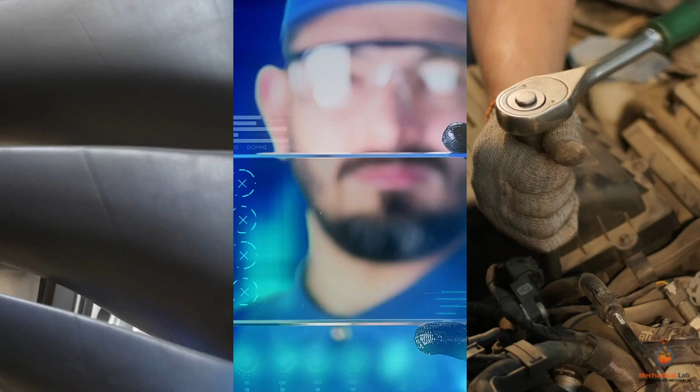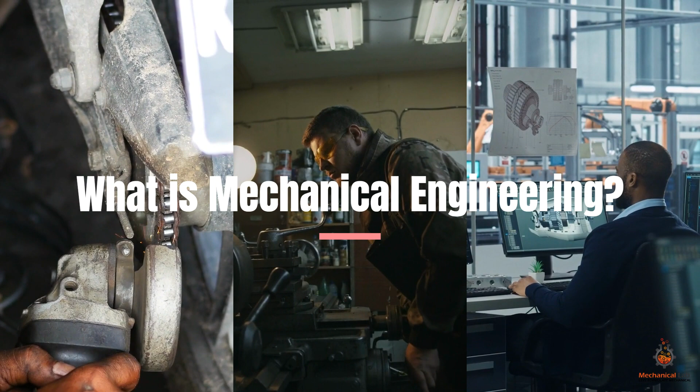In this video, we will delve deep into the fascinating realm of mechanical engineering, exploring its essence, the foundational principles that underpin it, the diverse branches it encompasses, the exciting career opportunities it offers, the skills required for success, and the average salaries that await aspiring mechanical engineers. So, fasten your seatbelts and let's dive in.

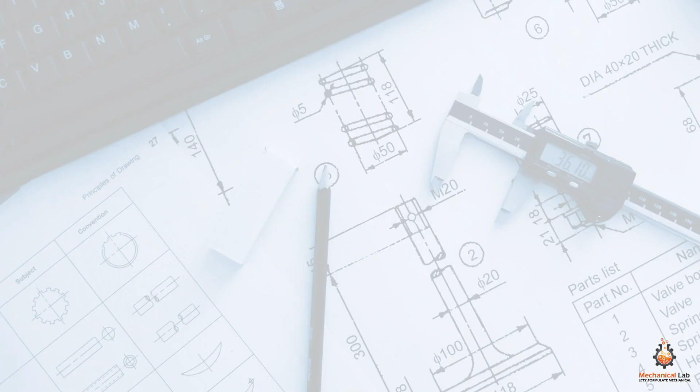What is mechanical engineering? Mechanical engineering is a captivating discipline that blends the principles of physics, mathematics, and materials science to design, analyze, and manufacture a wide array of mechanical systems. It is a driving force behind innovation and progress, shaping the world we live in. But what exactly is mechanical engineering, and how does it impact our lives?

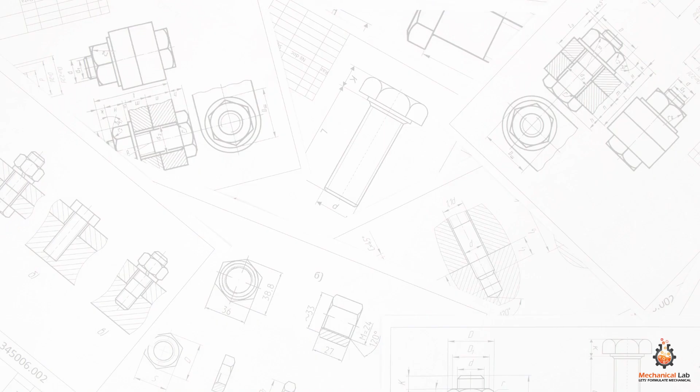Foundations in mechanical engineering. To truly understand the world of mechanical engineering, let's explore the core principles that underpin this dynamic discipline. These principles serve as the fundamental pillars upon which mechanical engineers design, analyze, and innovate.

Mechanics is the branch of physics that deals with the study of forces and motion. It enables engineers to understand how objects move and interact under different conditions, allowing them to design and analyze mechanical systems.

Thermodynamics focuses on the study of energy and its transformation. It provides engineers with the tools to analyze and optimize energy systems, ensuring efficient utilization and minimizing energy loss.

Fluid mechanics investigates the behavior of fluids, liquids and gases, and their interactions with solid objects. It is crucial for designing systems that involve fluid flow, such as pumps, turbines, and piping networks.

Materials science and engineering explores the properties, behavior, and selection of materials for engineering applications. It helps mechanical engineers choose appropriate materials based on their mechanical, thermal, and chemical properties.

Control systems involve the design and implementation of mechanisms that regulate and automate mechanical processes. Engineers use control systems to ensure desired performance, stability, and reliability in various applications.

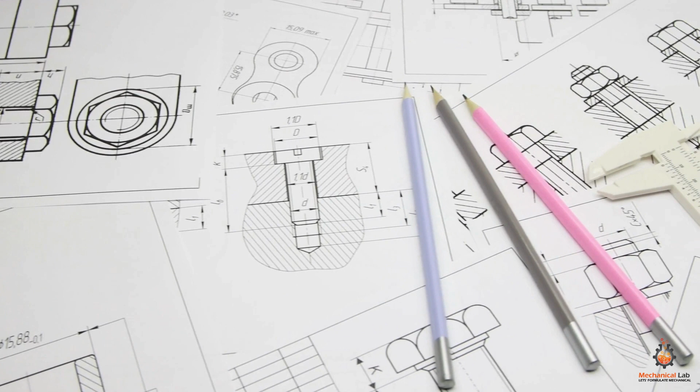And that wraps up our captivating exploration of mechanical engineering. We hope this journey has ignited your passion for this incredible field, inspired your career aspirations, and provided valuable insights into the foundations, branches, career opportunities, skills, and salaries associated with mechanical engineering.